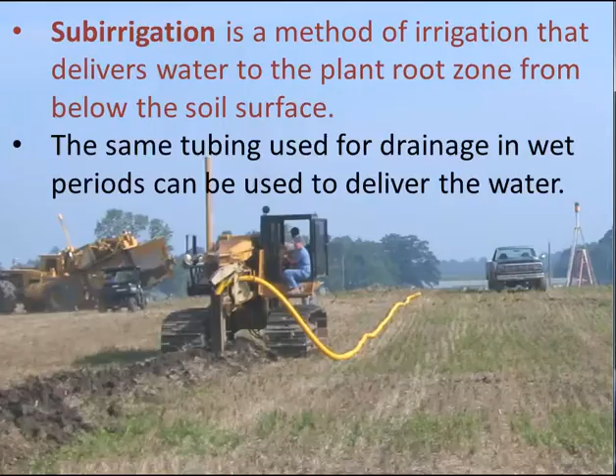Subirrigation is a method of irrigation that delivers water to the plant root zone from below the surface, and we often talk about it together with drainage because the same tubing that's used to drain the field during the wet times of the year can be used to deliver water in dry times of the year when irrigation could really be beneficial.

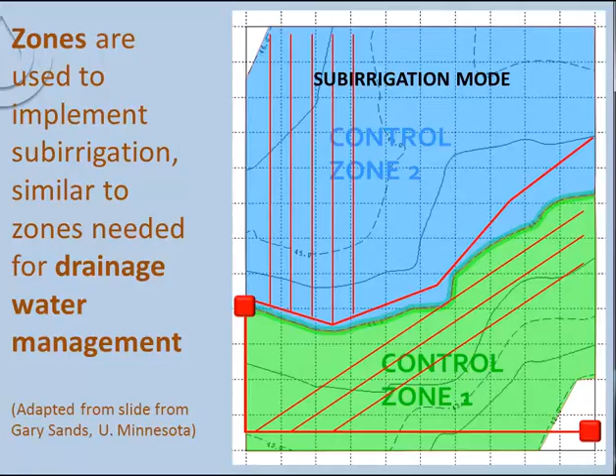When the same drainage system is used for subirrigation, water is instead added to the control structures, and the higher water level in the structures pushes water back up into the main drains and into the laterals. From there, as long as there's a fairly impermeable layer below the drains that holds the water table up, the water table will rise and the water can be used by the crop.

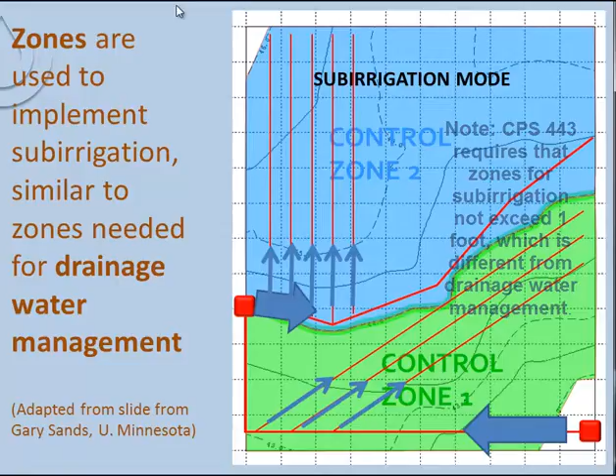Here's the same situation for Zone 1. For effective subirrigation, the water table should be fairly uniform, so that's one of the challenges.

The water table, of course, rises the most when it's directly over the tiles, as you can see in the top graph. In the photo of the cornfield below, from Missouri, you can see very dramatically how effective subirrigation was right over the tiles and how much less effective it is in between. That means subirrigation works best when we have highly permeable soils, allowing the water to spread out over an impermeable layer that keeps the water table high.

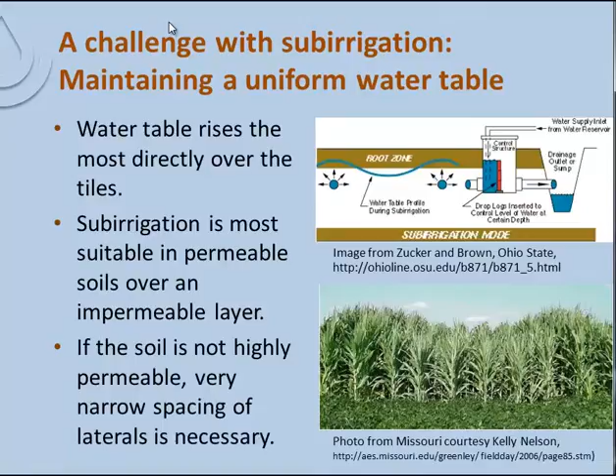Now, if we don't have those conditions, we can just use very narrow spacings of the laterals, and that, of course, increases costs. Of course, you need a water source for subirrigation.

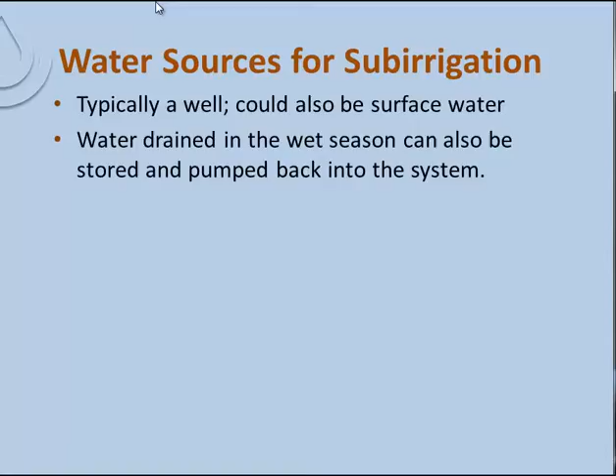Usually this would be a well, or it could be surface water if there's one that's reliable even in dry times of the year. An innovative alternative in our wet tile-drained areas would be to store some of the water when it's drained rather than letting it go into the ditch and eventually into the Gulf of Mexico or the Great Lakes downstream. This type of system can be called water recycling, and in addition to the yield benefits that are similar to other irrigation systems, this system would have the added benefit of reducing drain outflow and thereby improving downstream water quality. So it's a system with many advantages.

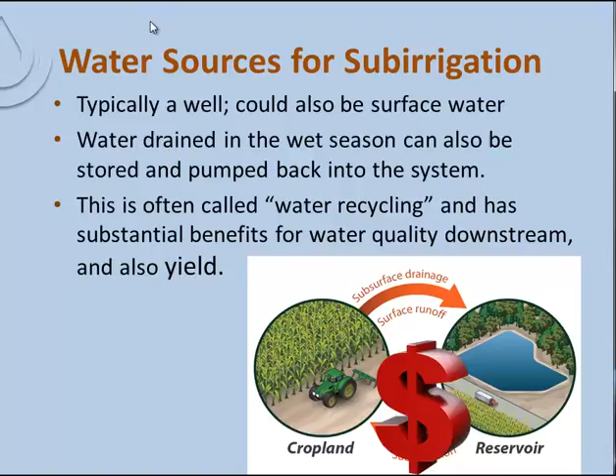Unfortunately, there's one big disadvantage, and that's the cost, both in infrastructure and the land needed for the storage reservoir. But especially as the climate becomes more and more variable and the risk of drought potentially increases, the benefits may start to outweigh the costs. So we shall see.

Now we'll turn to the conservation drainage systems, which, while they maintain and in some cases potentially improve crop productivity, the main focus is on reducing nutrient losses from the drainage system. I also wanted to add, when we say nutrients, we're talking about both nitrogen and phosphorus. Most of these systems were particularly developed for nitrate reduction, which is such an issue in tile-drained areas.

As you know, tile drains are installed for many good reasons. These are the intended effects. Among these are that we have more timely planting and increased yields, and that it can decrease surface runoff, soil erosion, and the loss of nutrients through these pathways.

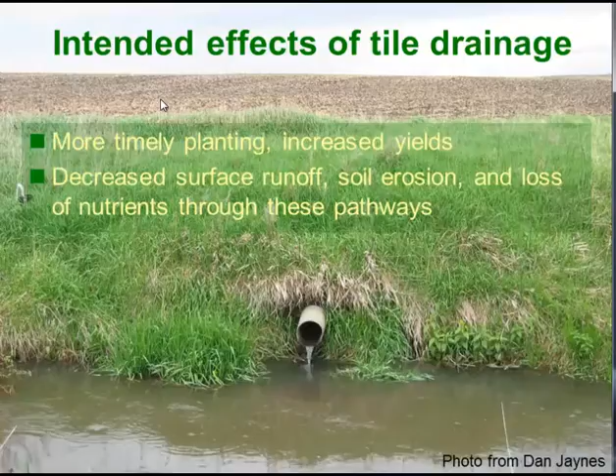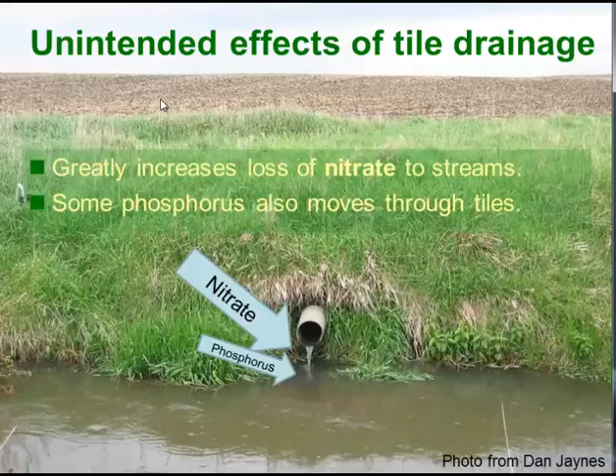In more recent years, we've been finding that some phosphorus also moves through the tiles. It's a much smaller amount, which I've tried to illustrate with a smaller arrow. In fact, it would be an arrow even much smaller than that, but I was afraid you couldn't see it if I made it too small. There is some potential for both of these.

One way to think about these conservation drainage practices is to separate where they work. Some of them reduce nutrient loss actually in the field. Others work at the field's edge when the water is already in the tiles, and some work downstream in the ditch or the stream or in a wetland, as we'll see in a minute.

So we're going to start with the practices that reduce nutrient losses in the field. Now, these are not always thought of as conservation drainage practices because some of them are just good nutrient management practices, but that's one of the best ways to reduce our nitrate loss or nutrient losses: use practices like nutrient management, 590, cover crops, and a conservation crop rotation. And then we'll also turn to drainage water management, which you've already learned about.

One of the good illustrations of the potential to reduce nitrate in tile drains through these in-field management practices is a long-term study by Dr. Eileen Kladivko at the Southeast Purdue Ag Center. When she started out, back in the 80s, the typical recommendation was to add 250 pounds of nitrogen per acre in continuous corn. And you can see that the nitrate levels that came out were typically in the 30s, more up around 30 milligrams per liter.

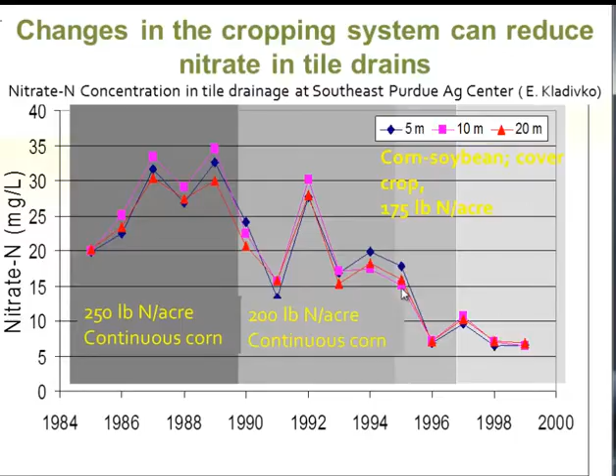In 1990, she reduced the amount of nitrogen applied per acre, and the rates of the loss concentration went down. Finally, in the later 90s, she changed to a corn-soybean rotation. She added a cover crop, and reduced the nitrate levels further, and as you can see, there's a very dramatic and wonderful decrease in the nitrate, down below 10 in most years. So that doesn't necessarily show that we need all the practices, but it does show the benefits of the practices in the field in reducing nutrient losses in the tile drains.

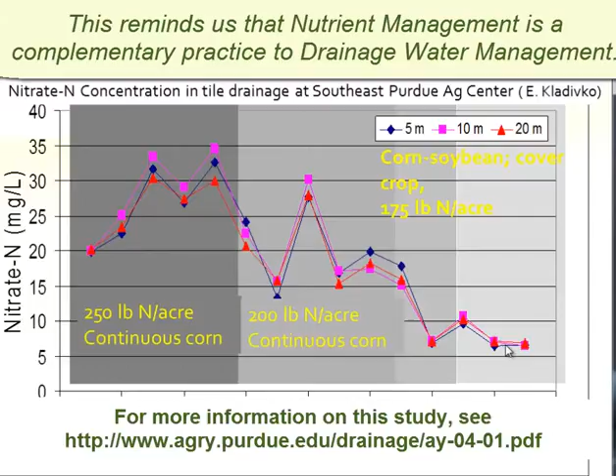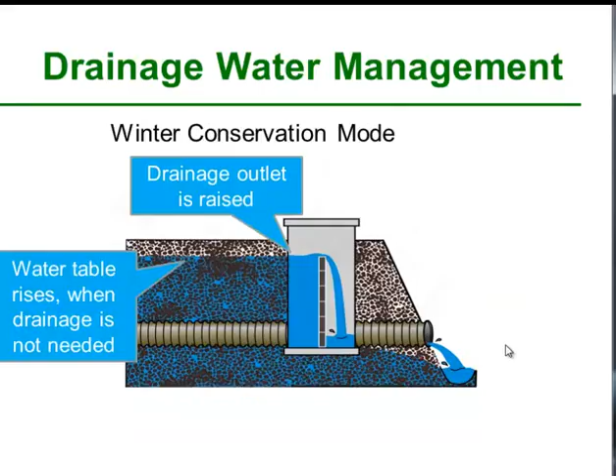Drainage water management, which you've already seen, I'm just going to remind you of it, is another in-field practice that allows us to decrease nitrate losses. If we have the tile drain with saturated soil below it, draining out to the ditch, during the winter we can hold the outlet high and the water table rises when the drainage is not needed. Before planting, we can lower it, and in the summer raise it again partway to add crop benefits.

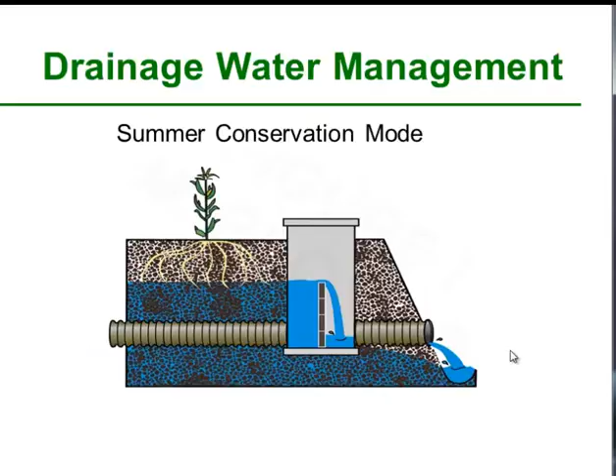So those are the in-field nutrient loss strategies, or conservation drainage strategies. Now we're going to turn to those that work at the edge of the field.

And the first one is the practice called denitrifying bioreactors, or as I usually call them, woodchip bioreactors, because I think that's clearer and conjures up the image of what they do. There is an NRCS interim conservation practice standard 747 that's available in some states. This is still a practice that's being developed and tested, but there are more and more demonstration sites that can give us insight.

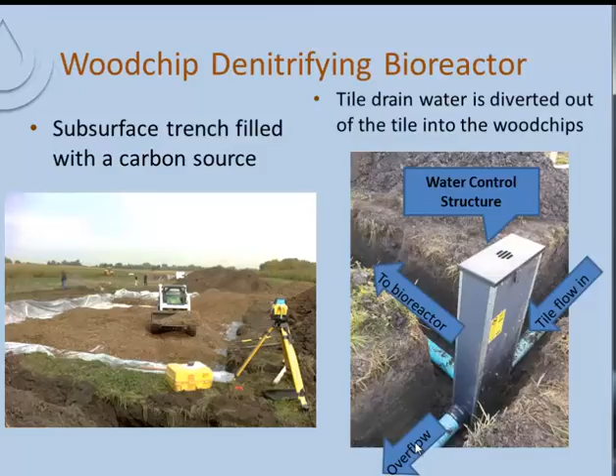So the woodchip denitrifying bioreactor is basically a large subsurface trench, or more like a hole or a pit, that's filled with a carbon source, usually wood chips. The way it works is that the tile drain water, shown here, is diverted. Instead of just flowing out to the stream, it's diverted using this control structure into the bioreactor. At the same time, we always need to have an overflow that allows water, if it's flowing in at too high a rate, to go directly to the stream.

The wood chips provide both habitat and food for the all-important denitrifying bacteria, and it's those bacteria that actually treat the nitrate.

Denitrifying bacteria need several things. They need food, which is the carbon in the wood chips. They need a place to live, which the wood chips provide. They need anaerobic conditions, which is provided when we're able to hold the water table high enough that the wood chips are saturated. And then they need the nitrate to breathe. When they do that, they denitrify the nitrate, which is NO3, through a number of intermediate pathways into N2 gas, which is the most common element of our atmosphere and quite harmless. So it's a wonderful process.

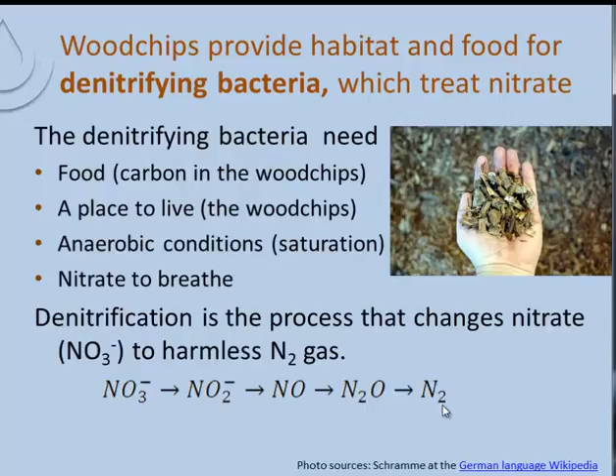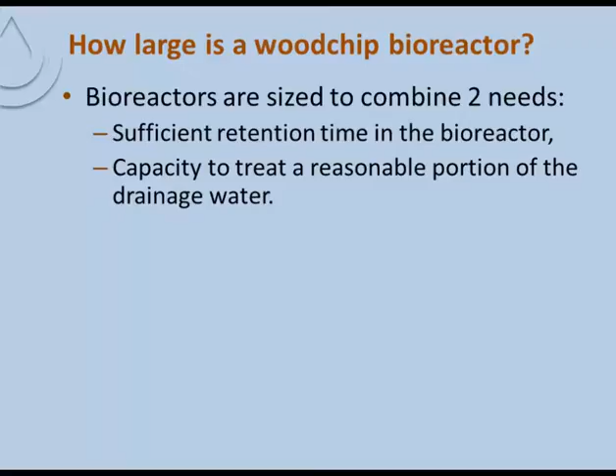So how large do bioreactors need to be? I won't go into detail on design here, but basically they need to fulfill two objectives: first, to have sufficient retention time in the bioreactor to treat the nitrate, and second, to have the capacity to treat a reasonable proportion of the flow. So that ends up meaning they're quite large.

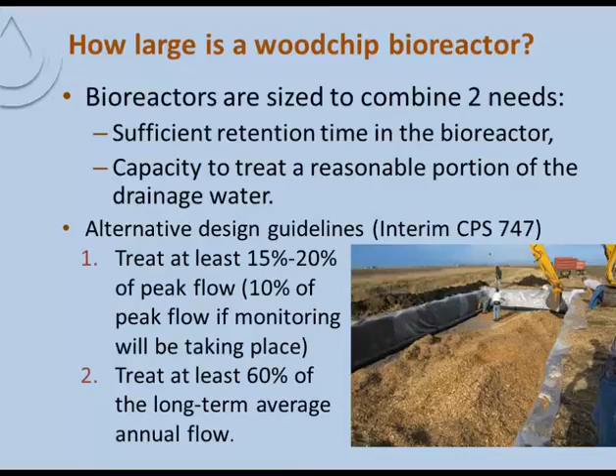There are sizing tools available through Iowa State University, the University of Illinois, and Illinois NRCS. There may be others by the time you see this.

The other thing I wanted to show was Dr. Richard Cooke in Illinois has developed this bioreactor performance curve. He plots loading density on the x-axis, in acres per 100 square feet of bioreactor, versus the amount of load reduction, and encourages design in this part of the curve.

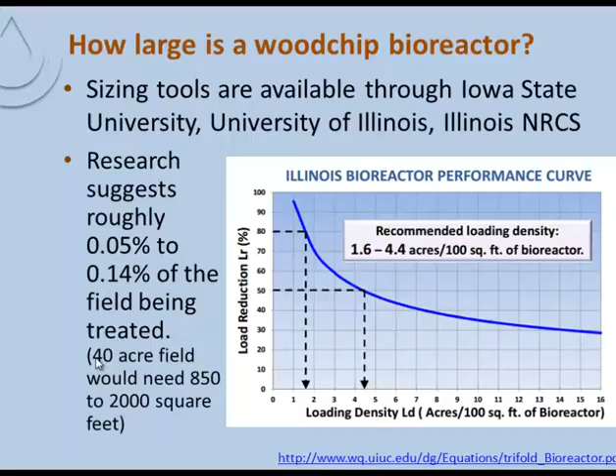Another way to look at it is roughly 0.1%, or a tenth of a percent, so from 0.05% to 0.14% of the field being treated. As one example, if you had a 40-acre field, you would need somewhere around 850 to 2,000 square feet. But as I said, there are many demonstrations available now.

One is from Illinois, and these photos are available on the web. They installed a bioreactor in the buffer. Here you can see the ditch, and they put the water control structure here to intercept the tile drains, and then it goes into this fairly large hole, which gets lined with plastic.

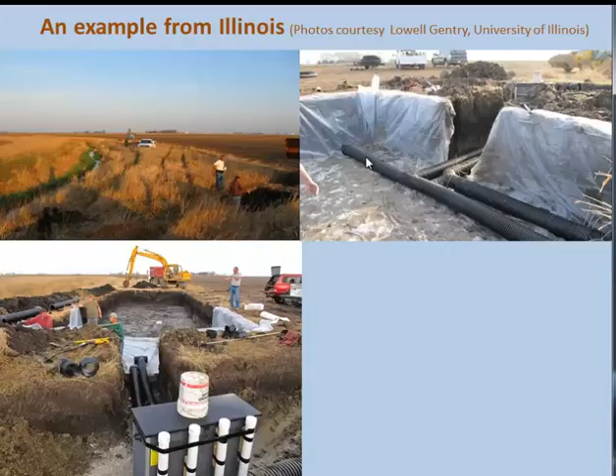The purpose of this tile is to spread the water out across the entire bioreactor, and then it gets filled with wood chips.

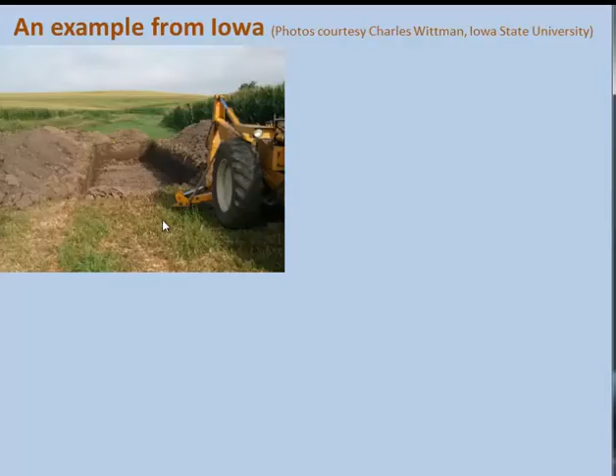Another example from Iowa, and these photos are from Iowa State University. Here is one that's a little smaller, but also in a buffer. The hole is dug, the tiles are laid to spread out the flow, and the wood chips, which come in a large semi, are spread. Here they're all spread out to a level, and then it's covered with soil so that this can be replanted.

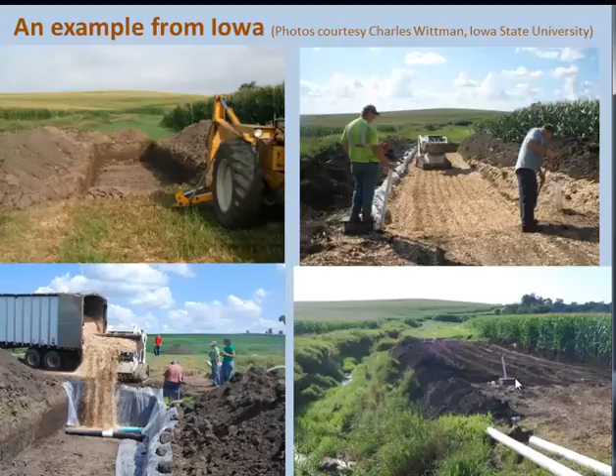So denitrifying bioreactors are wonderful. They're very effective at treating the water that actually flows through them, but they do require a lot of wood chips. Many people often ask about their lifetime. It's not yet known, but we know it's greater than 10 years. I don't think any of them have failed yet.

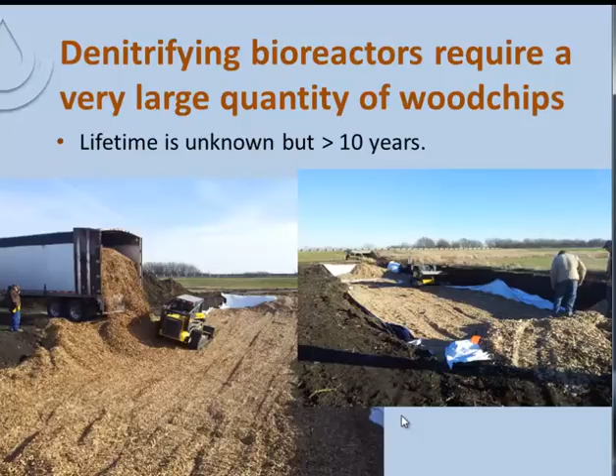The next conservation drainage practice I'll be discussing is what's commonly called the saturated buffer, or sometimes resaturated buffer. The interim NRCS standard, available in only a few states, actually calls this a vegetated subsurface drain outlet.

The saturated buffer is an innovative practice that takes drainage from the field, and instead of allowing it to continue in the subsurface under the buffer—essentially nullifying the potential treatment of the buffer—as shown on the right, it adds a control structure at the edge of the buffer and pushes the water into additional tubing laid along the upstream side of the buffer.

There is an overflow discharge if more flow is needed, but most of the flow goes into these two tiles and works its way along the buffer so that it spreads out and makes the whole buffer saturated. The genius of this is it allows the buffer to use the process of denitrification or plant uptake to fully function and take up the nitrate.

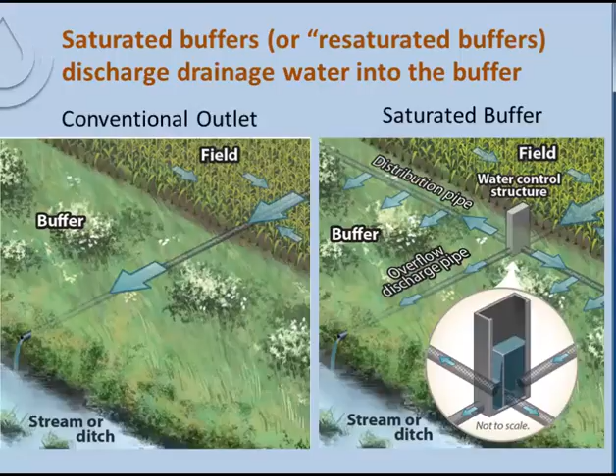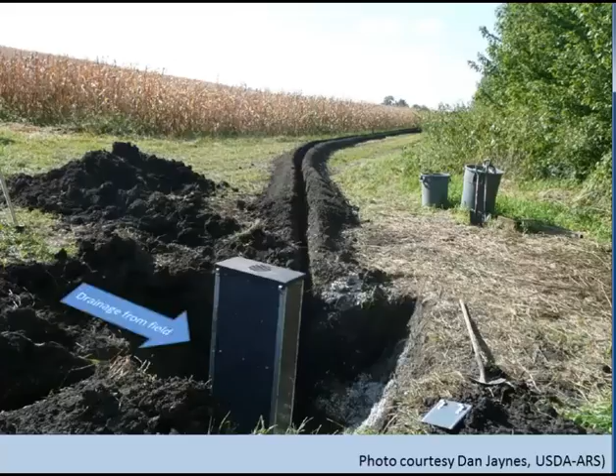Here's a photo that might allow you to see more clearly how this process works. You can see the corn upstream and the drainage from the field coming into the control structure from there. The raised outlets push the water into perforated tubing or drain tile on both sides of the control box so that it resaturates this buffer, shown here with trees on the right side.

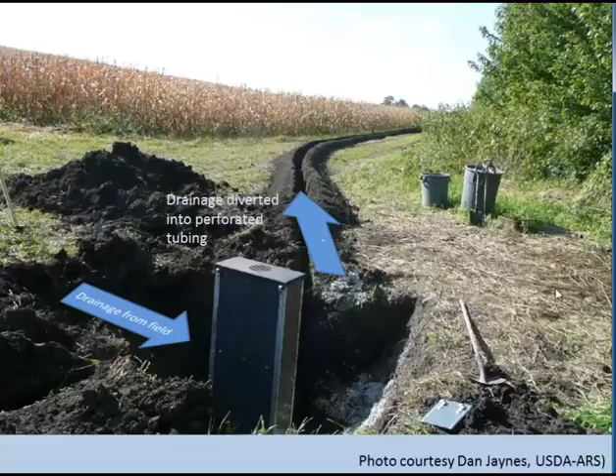The effectiveness of the practice has been monitored by Dan Jaynes of the USDA Agricultural Research Service. They found that for the water that actually flows through the buffer, nearly all the nitrate is treated. Now that sounds great, but unfortunately it's difficult to design a system in which all the water can actually flow through the buffer. The flow is limited by the permeability of the soil—more water simply can't flow through the length available.

The length is limited by, in this case, the length of the tile feeding the saturated buffer, which was limited at both ends by field tiles—there's one here and one here. So this 900-foot length was all that was available.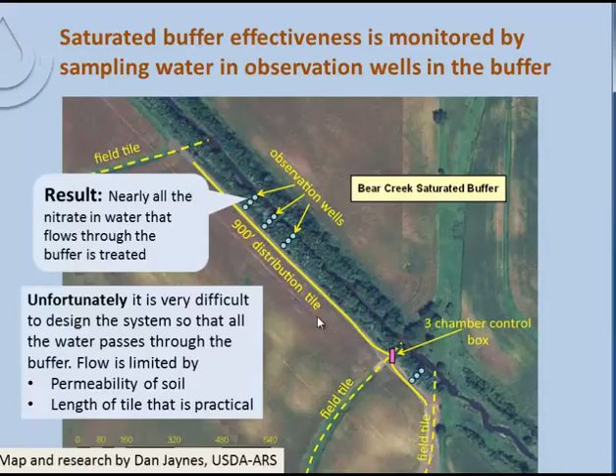Because the distribution tiles can't handle all the water during peak flows, there's an overflow drain that provides an alternative pathway for drainage water so it doesn't back up in the field. So the drainage works well under all conditions, but the water that flows through the overflow drain is not treated. That's a limitation of the saturated buffer that's important to understand.

Research so far has been quite limited, but about 15 additional saturated buffers have been installed and are being monitored, so we'll know more about this practice in coming years.

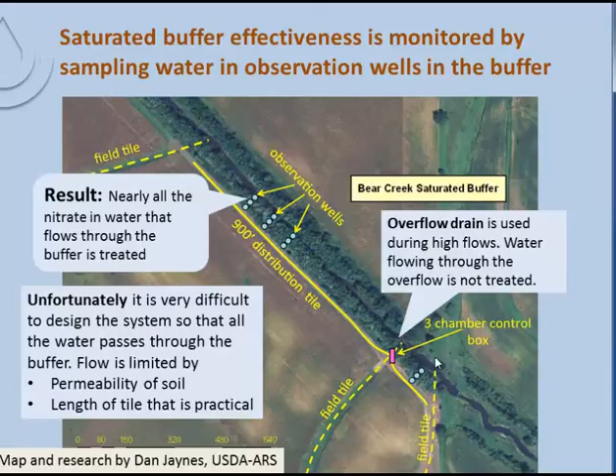Constructed wetlands are a conservation practice with many benefits. When used as a conservation drainage practice, they consist of a shallow basin with vegetation constructed to intersect and treat the flow of contaminated runoff, or in this case, drainage water. Constructed wetlands can remove nitrogen and phosphorus through three methods.

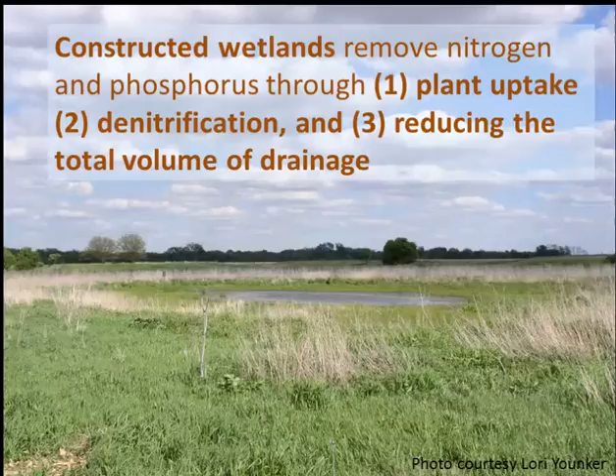The plants can take it up, denitrification, which we've talked about before with the woodchip bioreactors, or reducing the total volume of drainage, and usually all three of these take place. So let me talk about them.

The wetland plants contribute to water quality because they use the nutrients that are in the water for plant growth. This process is called plant uptake, and it moves the nutrients out of the water and into the plants. And if they're harvested, then that takes them out of the system.

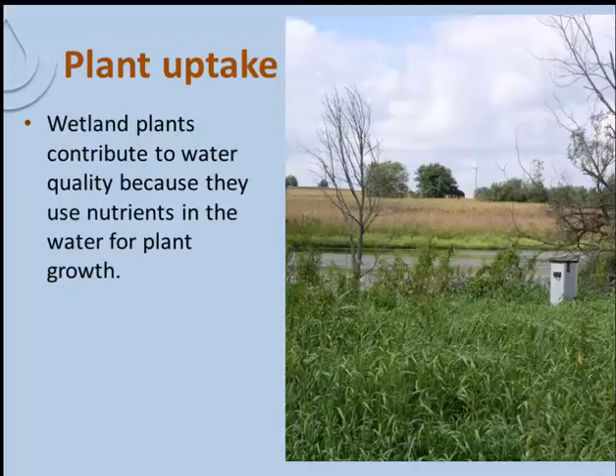The next method of treating nitrate is denitrification. As you recall, this is the process where denitrifying bacteria change the nitrate to harmless nitrogen gas, in a process that starts out as nitrate and ends up as N2.

The third process is actually reducing the volume of drainage, and wetlands can do this through infiltration. Some of the water, as it's sitting in a wetland, can actually infiltrate or seep into the ground. There will also be increased evaporation over a system in which the water flows directly out into the ditch or stream, and the plants will use some of the water and transpire it. So all of these result in water quality benefits as the drainage volume is decreased.

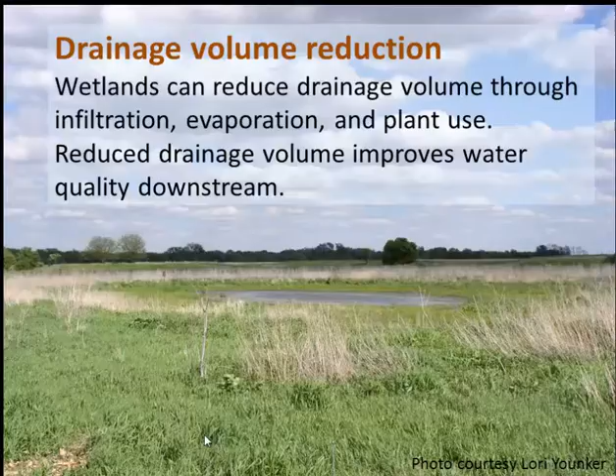Wetlands, of course, have a cost, and one of the costs is that they take quite a bit of land out of crop production. Researchers at Iowa State found that 0.5% to 2% of the total watershed area should be in a wetland to really effectively reduce the nitrate. You may remember the bioreactor uses a much smaller percentage, more like 0.05%, but the difference is that wetlands have many other benefits.

For example, they provide habitat for wildlife, they provide beauty in the landscape, and so the public often funds this amount of land, which is increased also by the need for a buffer, so that all these benefits can come about.

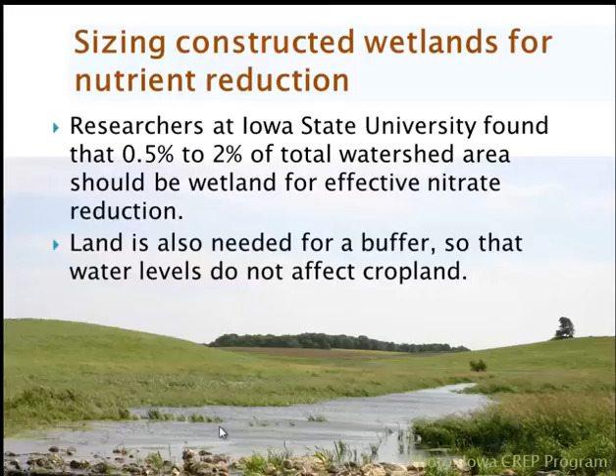The final practice I'll be talking about is called the two-stage ditch. It's another downstream practice and is not yet widely used or cost-shared by NRCS. The practice 608 can possibly fund this, and in Indiana it's the 582 open channel standard that is used for two-stage ditches.

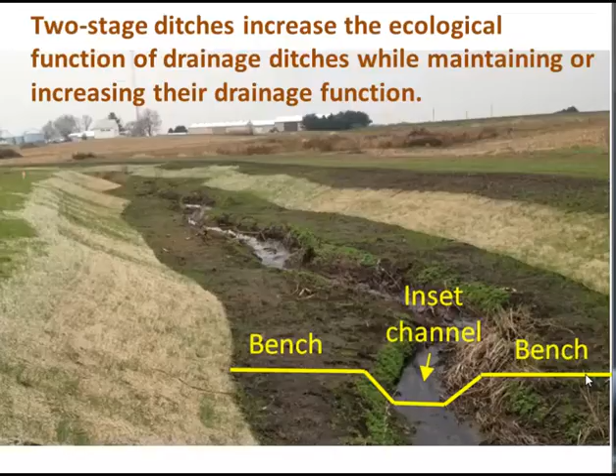Basically, two-stage ditches can increase the ecological function of drainage ditches while maintaining or even increasing their drainage function. Two-stage ditches do that by keeping the inset channel the same as before construction, but adding a second stage that consists of benches, which are really miniature floodplains within the channel of the ditch. In that way, when there are high flows, the water is able to go out on the benches, essentially mimicking natural streams, which are able to go out on their floodplain. This makes them more stable and also assimilates nutrients.

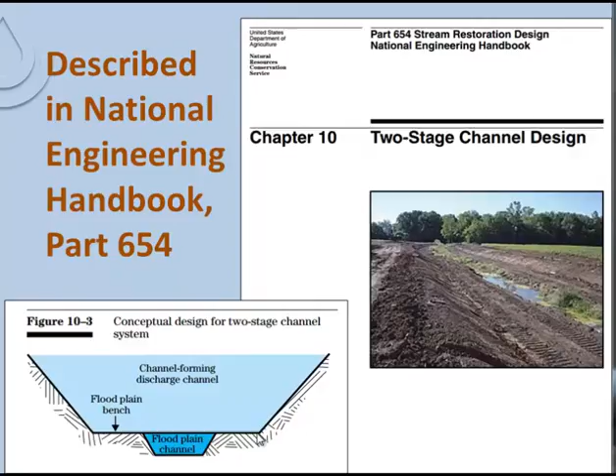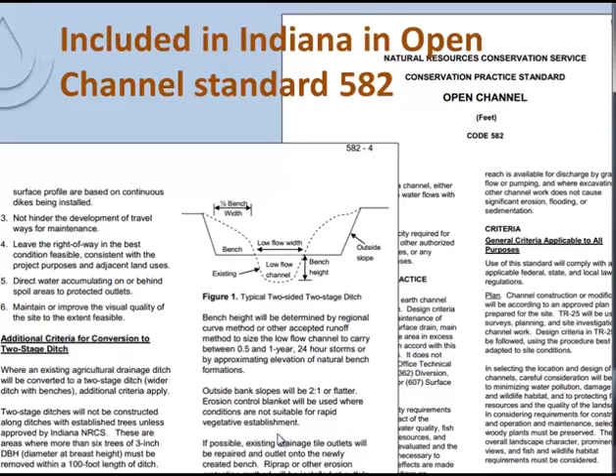In Indiana, the open channel standard has described this two-stage process or two-stage ditch design, explaining additional criteria for conversion to a two-stage ditch. Ditches like this, with a trapezoidal format and even armored by riprap, were once standard, and in fact were supported by Indiana NRCS practices in the past.

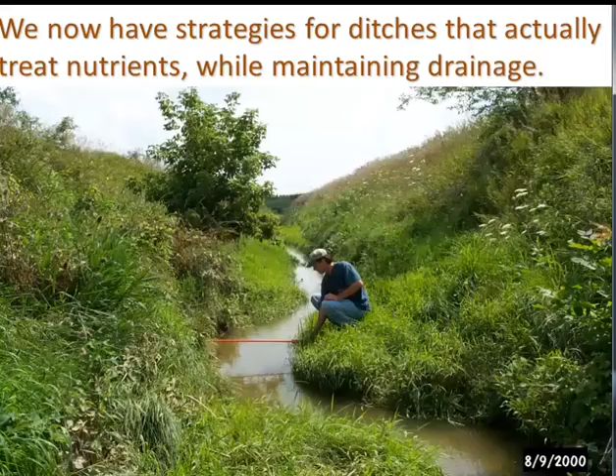We now expect our ditches to have more function, to actually treat nutrients while maintaining drainage. This kind of ditch, filled with wonderful vegetation of all kinds and with a meander, has so many ways that ecological function can be improved through denitrification and assimilation of nitrogen or phosphorus.

I often show this picture to farmers and drainage contractors in my state and ask what they think, and the most common thought is that this looks really messy and they want to get in there and clean it out. So it's really a shift in mindset, and the two-stage ditch is just part of it. The idea that our ditches can be richer ecosystems with true ecological functions is really a path forward as far as treating our nutrients.

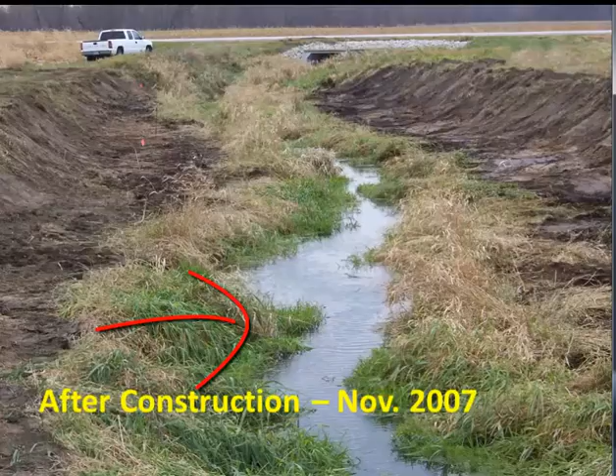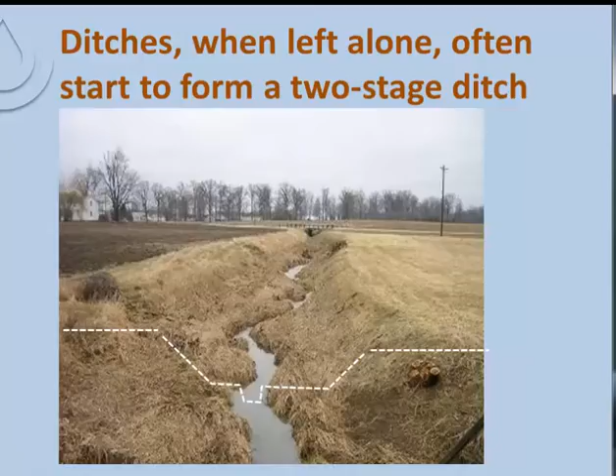The dashed black line is a typical surveyed cross-section of an existing ditch, and the red line is the shape it will be after excavation. This uses spreadsheets that were designed in Ohio and have helped many people design their ditches.

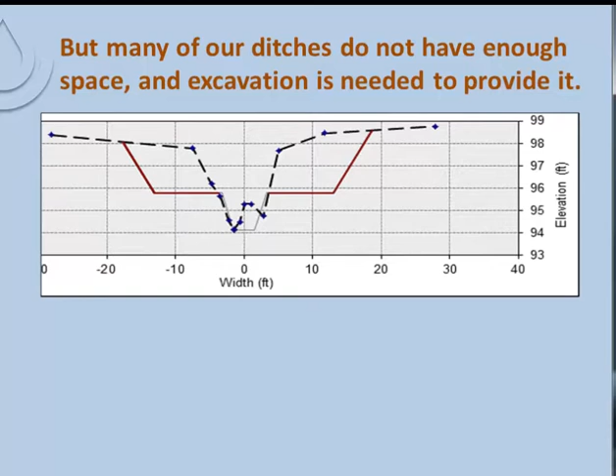To better understand the process of constructing a two-stage ditch, I thought I would include a little video from the construction of the two-stage ditch on a Purdue research farm. It was done by the Land Improvement Contractors Association as a field day, which had an educational purpose both for the public, who was invited to watch at any time, and for the contractors themselves, none of whom had done a two-stage ditch before.

So there's a little more machinery in this video than you would see at a typical excavation. Notice how the excavators stay on the banks at all times and don't touch the main channel of the ditch itself. This ensures that the vegetation and stream channel bottom, which are in contact with the aquatic life of the stream, are not directly affected. This is also done so that a Clean Water Act permit from the Corps of Engineers is not required, although requirements may differ in other cases.

Another thing to notice is the large amount of spoil dug out of the ditch channel. This is unavoidable and, in fact, is one of the barriers to two-stage ditches at many sites. On this project, the spoil was simply feathered out over the entire buffer width, and you see the bulldozer and other equipment working on that. We were fortunate to have a wide buffer. Depending on soil quality, it may also be spread out on the cropped fields.

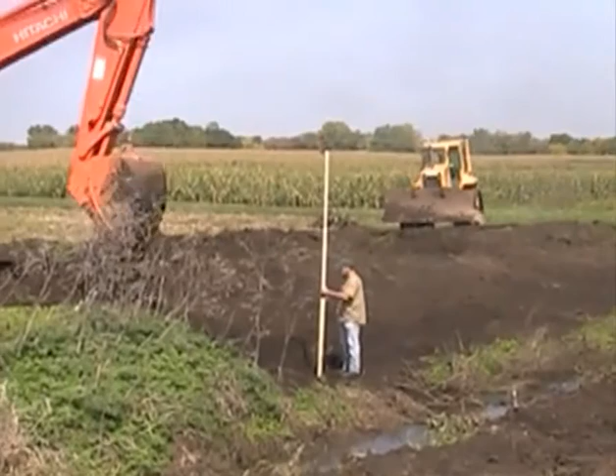One thing that's clear from the video is that constructing a two-stage ditch is not a small or low-impact project. It's a major construction project that leads to considerable temporary disturbance. However, projects that have been implemented have all led to greater stability of the channel in the long term, as the wider channel with floodplain benches allows more natural fluvial processes in the channel.

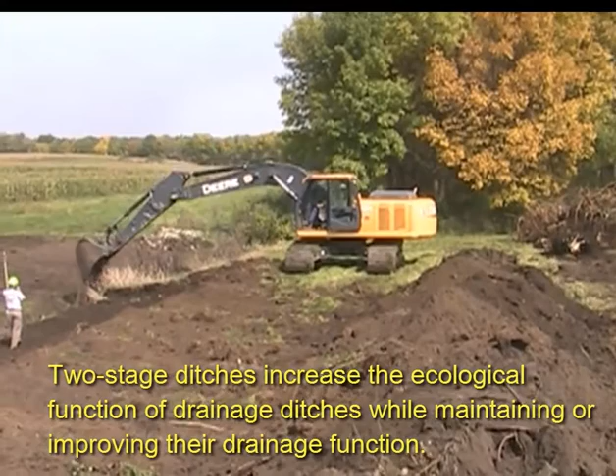So once again, the two-stage ditch increases the ecological function of drainage ditches while maintaining or increasing their drainage function. Two-stage ditches are more stable. They allow for more denitrification in the benches to reduce nitrate, and they appear to lead to improved water quality, although more research is needed.

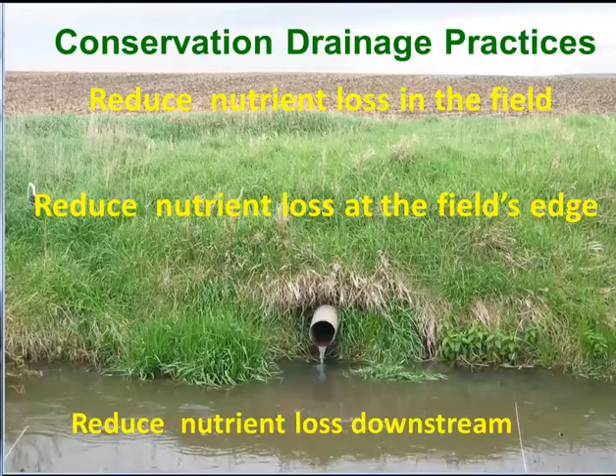In this module on related conservation drainage practices, we looked at practices that reduce nutrients in the field, at the edge of the field, and downstream. Specifically, we discussed how subirrigation requires zones like drainage water management, but also a water source; how the wood chips in a denitrifying bioreactor provide habitat and food for the bacteria that convert nitrate into atmospheric nitrogen; and how saturated buffers recreate some of the nutrient-reducing functions of a buffer.

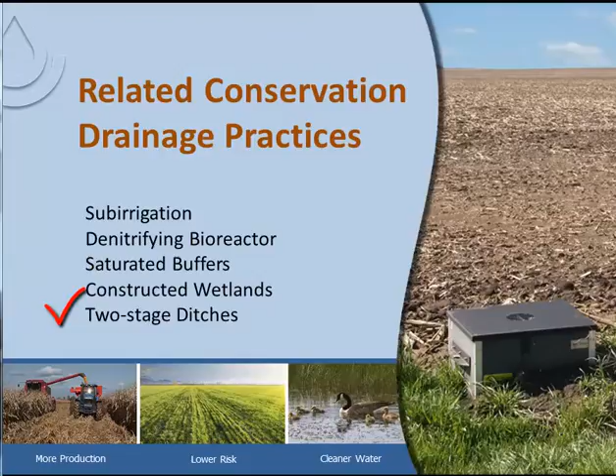We also reviewed constructed wetlands that reduce nutrients through plant uptake, denitrification, and reduction in drainage volume, and the two-stage ditch, which provides a wider channel than typical narrow trapezoidal channels and therefore improves their ecological function. Together, these practices provide many options for landowners, many tools in the toolbox to reduce nutrient loads from our drained agricultural lands. Thank you.